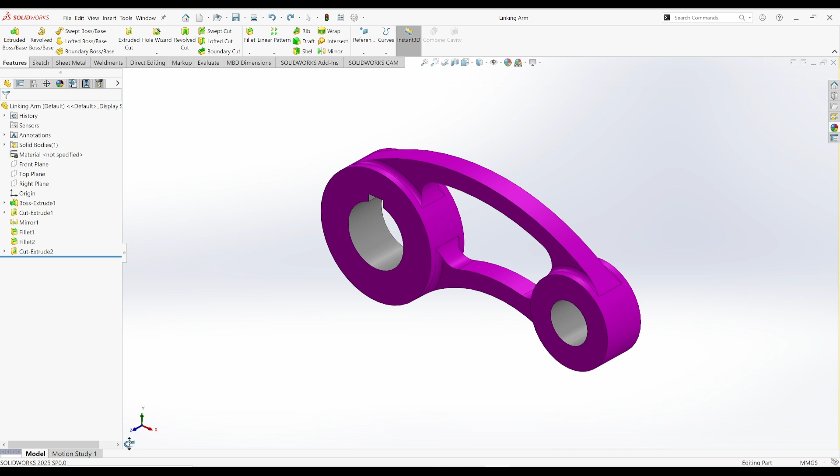Hey guys, in this video I'm going to be modeling this linking arm with you step by step in SolidWorks. So let's jump right into it.

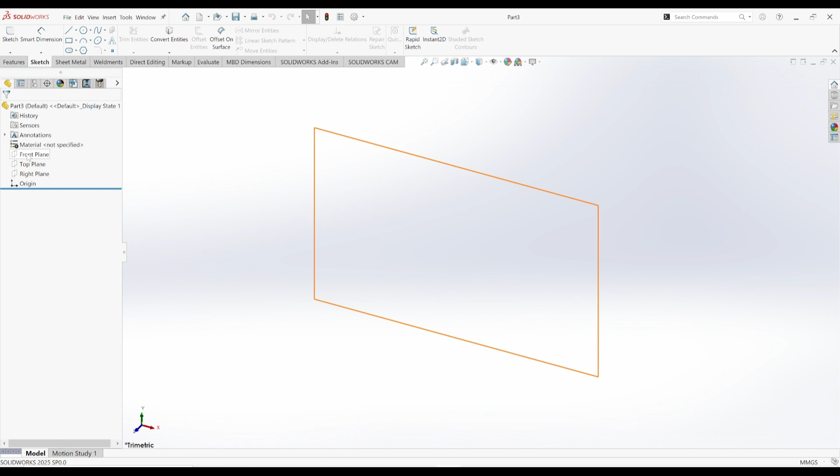So first I have my SolidWorks open here. I'll come to the top section here and select new, click on part and click on OK. Once that's open, I can extend this a bit. So I'll start with my sketch. Check that your units are in millimeters, so I have mine in mm. That's perfect. So I'll start with my front plane, select front plane or right click and select sketch.

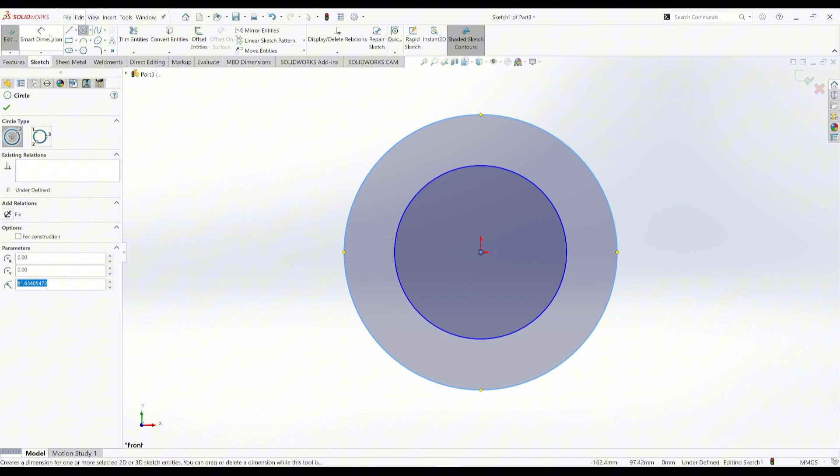I'll start with a circle. I'll come to this top menu here, select circle. I'll move to my origin, snap and extend. I'll create another circle from the origin, snap and extend. So I have dimensioned these two circles by coming to Smart Dimension. Select the first circle and this has an OD of 60 mm. Select the smaller circle and this has an OD of 30 mm.

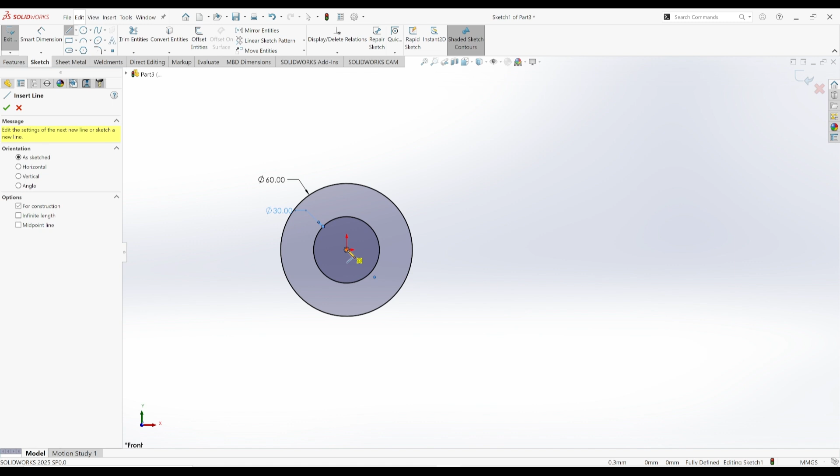So next I'll zoom out a bit and move to line. I need a construction line for the right side. So I'll select line here, under option select for construction. I'll snap from my origin to the right. Escape. If it doesn't end up horizontal, you can select the line and then make it horizontal, but mine already is.

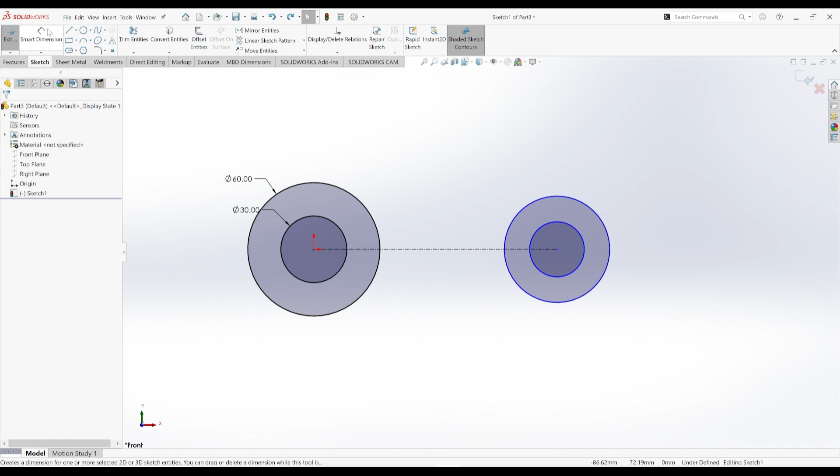So I'll draw two circles as well. Come to circle here. I'll draw my first circle and my second circle. So I'll dimension them as well. I'll go to Smart Dimension at the top. I'll select the first circle, that's going to be 42. I'll select the smaller circle, that's going to be 20.

Now with that defined, the center points of the circles from each other are dimensioned. So Smart Dimension as well, you can just select this line instead and define it to be 105.

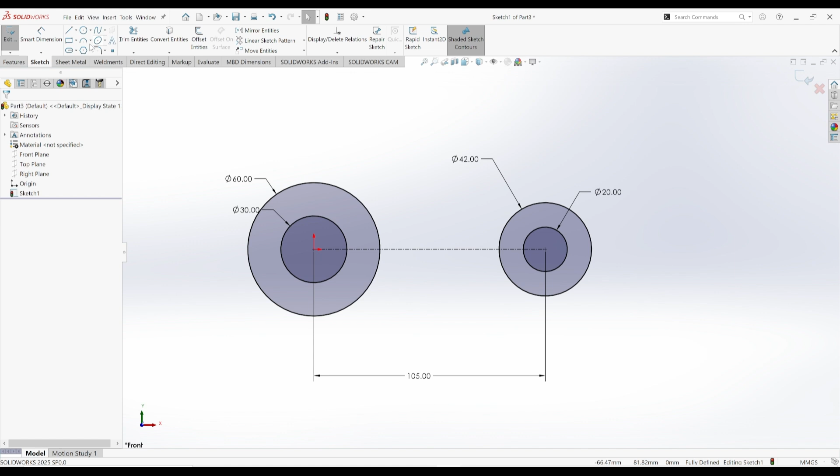Okay, so now I have that. I just need to add those two arms or the linkage. So in this case, we'll use 3-point arc. If you don't have it selected already, you can drop down here and select 3-point arc, or once you select the arc function here, you select it here. So I already have it selected. I'll select the first end here to this end and snap anywhere here.

First I'll define my radius, come to Smart Dimension, select this and define it to be 115. Hit escape, select your arc and this circle and make them tangent, and we'll do the same on the other side as well. Your arc and this circle, make them tangent as well.

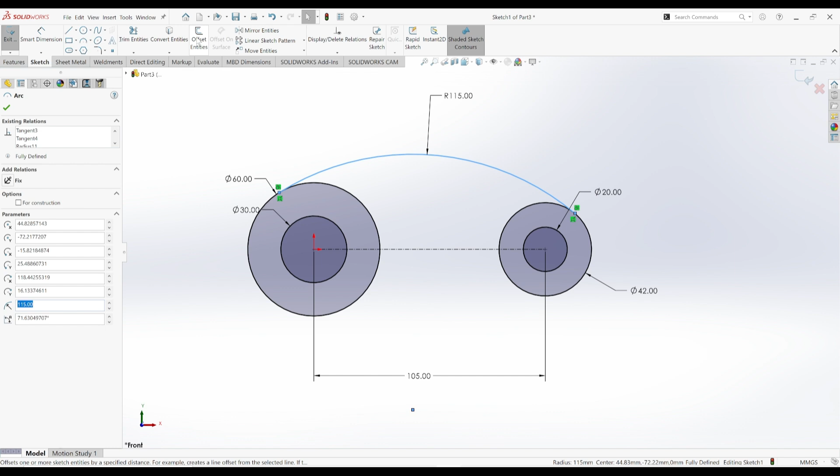So next thing we want to do is make an offset. I'm moving this dimension so you can see well. I'll select this arc and make an offset downward by 8 mm. So select that line and click on offset entities here, and define a distance of 8, and this is perfect, click OK. So now I'll trim this excess off. I'll come to trim entities, leave it at power trim, and I'll cut this off and cut this off. Hit escape. So we'll do something similar for the lower arm.

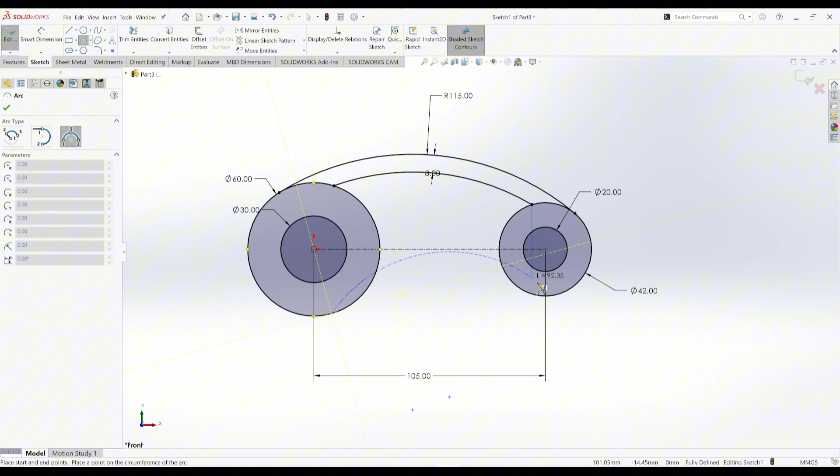So select your 3-point arc, this circle to this circle and snap anywhere. I'll define the radius, Smart Dimension, select the arc, and its radius is 60. Select the arc and the big circle and make these tangent. We'll do the same thing here, arc and circle, make it tangent. So now it's fully defined.

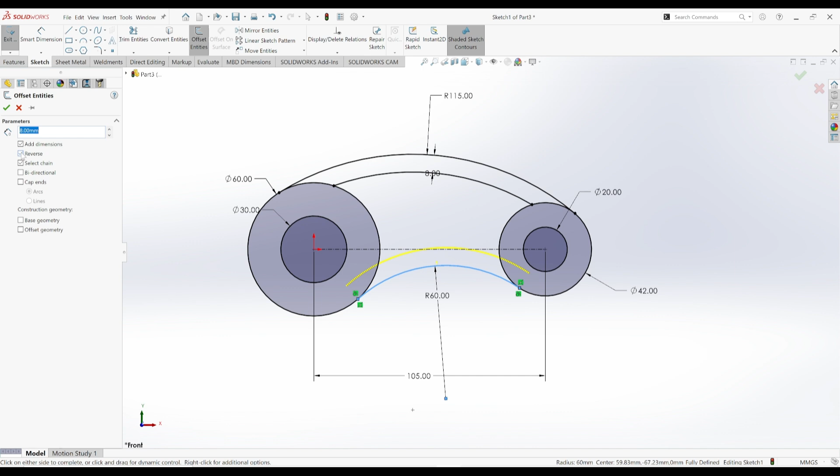I'll also offset it 8 mm, but in this case upwards. So I'll select the arc and click on offset entities. 8 mm is perfect, but it's in the wrong direction, so we'll toggle on reverse here and click on OK. So now I'll trim the excess off. I'll come to trim entities, trim this off and trim this off as well. Okay, click on OK. And I'll make an extrusion from here.

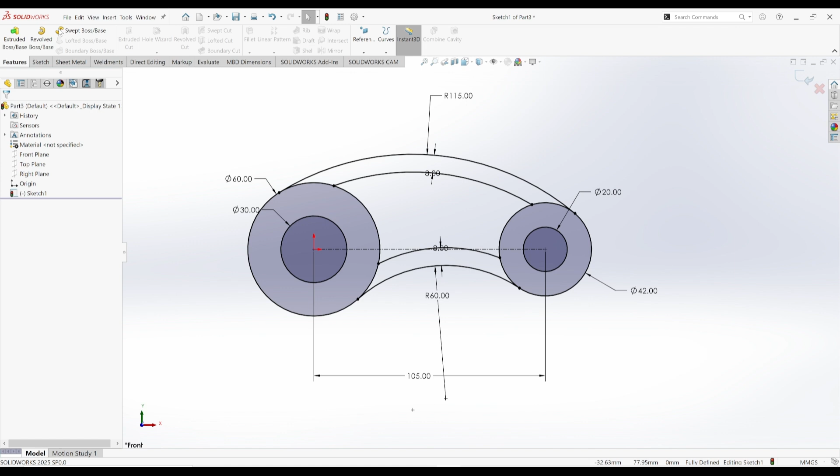So I'll go to features, Extruded Boss. The extrusion here is going to be 20. And I'll select this, this, and this. Okay, then my direction, drop down and select mid plane. So click on OK.

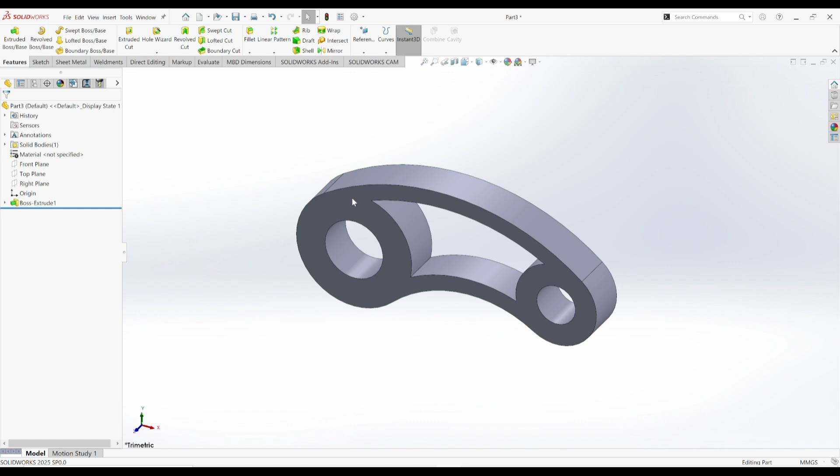So now we have the base, we just need to make a few cuts. So I'll select this face, right click and select sketch. So I'll select that face again and come to convert entities. Then I'll draw two circles again. So from the center point, I'll snap to this point. Center point, I'll snap to this point. That defines the OD, or you could define them manually if you want to.

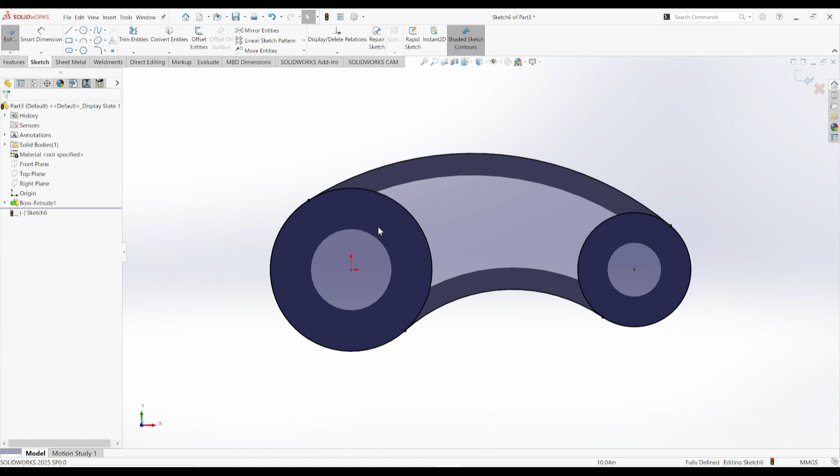So now I have that, I'll make a cut. So I'll come to features, extruded cut, and select contours, click on this window, and I'll select this section and this section. So I'm just going to be cutting it deep by 5 mm. Click on OK.

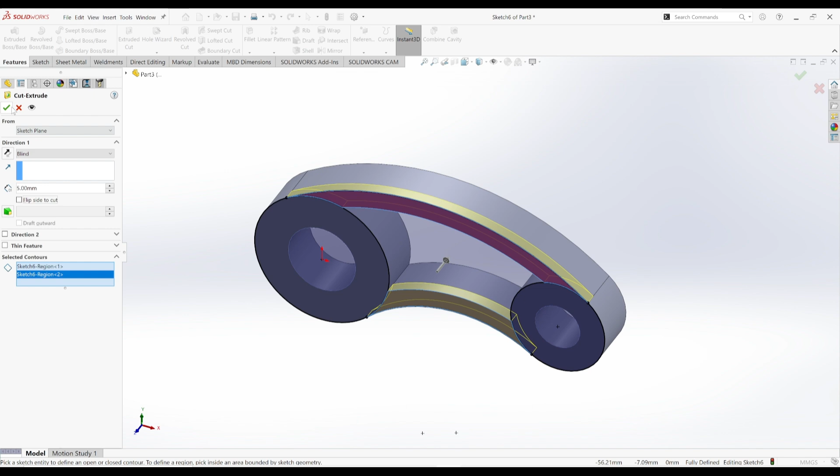So I'll mirror that cut extrude to the other side. I'll come to mirror here, drop down here to see my design tree. I'll select that feature. First I need to select the plane, so I'll mirror through the front plane, then click on this window to put the feature and select your cut extrude. Then click on OK. So now you have that.

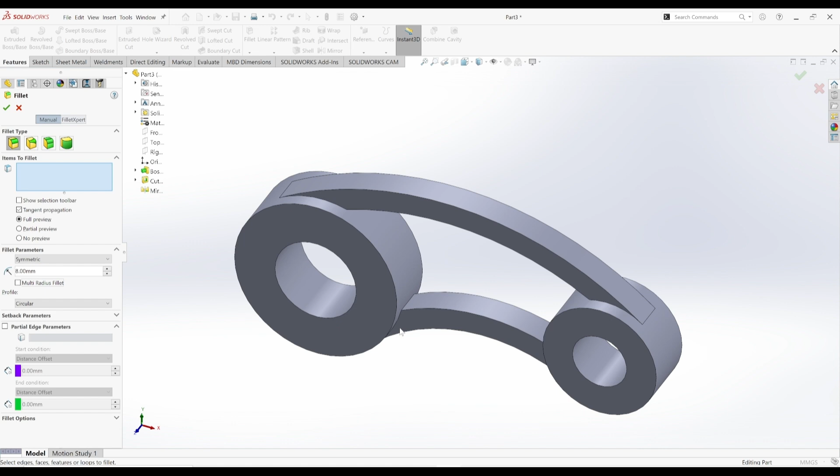We'll put in some fillets. So come to fillets, and for this internal section we have a fillet of 8 mm on all four corners. So I'll put in the value of 8 and select this corner, this corner, this corner, and this corner. Click on OK, that's perfect.

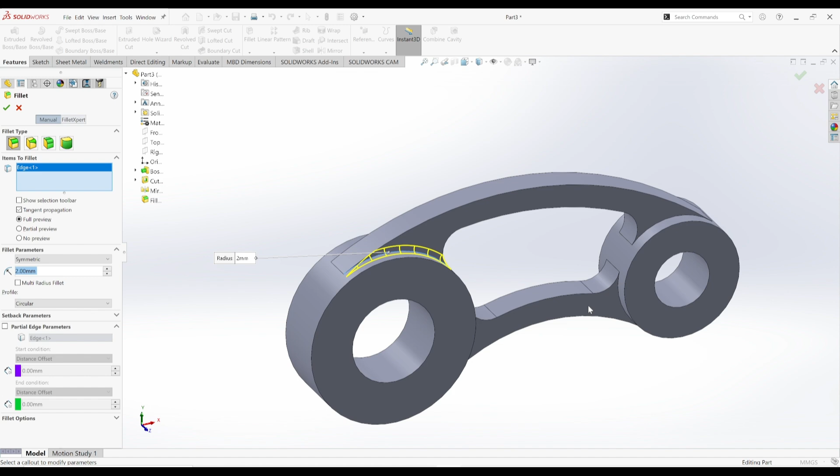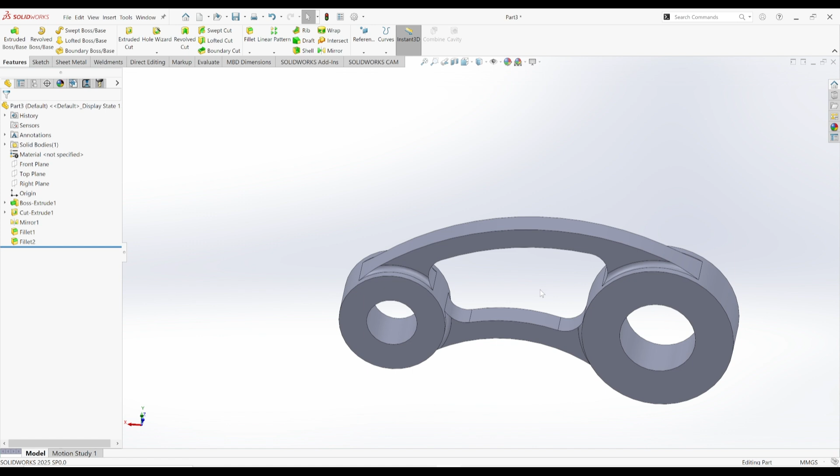Next, to add fillets to these edges. So I'll come to fillets again, in this case the fillets are 2 mm. So define 2 mm here and select this face, this, and this corner. You can flip to the other side and do the same thing: 1, 2, 3, and 4. That's perfect, hit OK. So now all we are left to do is just cut our keyway.

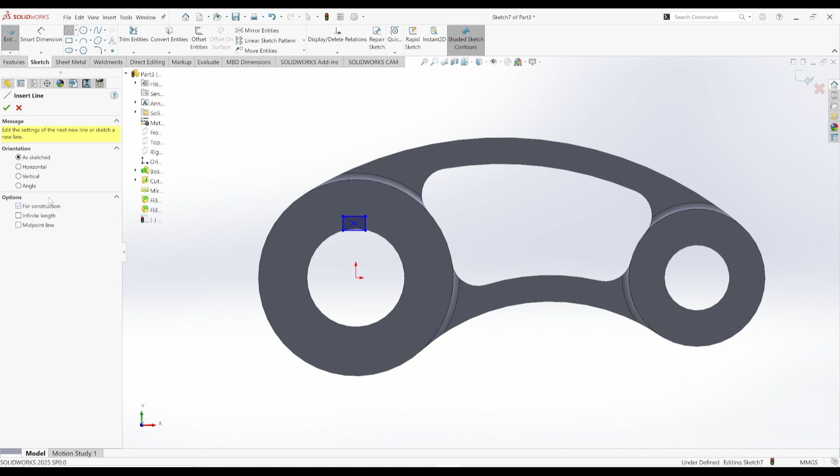So I'll select this face again, right click and sketch. And now I'll draw a rectangle, corner rectangle. From this end, just extend, escape, come to lines, create a construction line from the origin to this center point of your rectangle rather. I missed that snap, so I'm just going to zoom in a bit more. Okay, so I'll select this and click vertical. Okay, all right, that's okay.

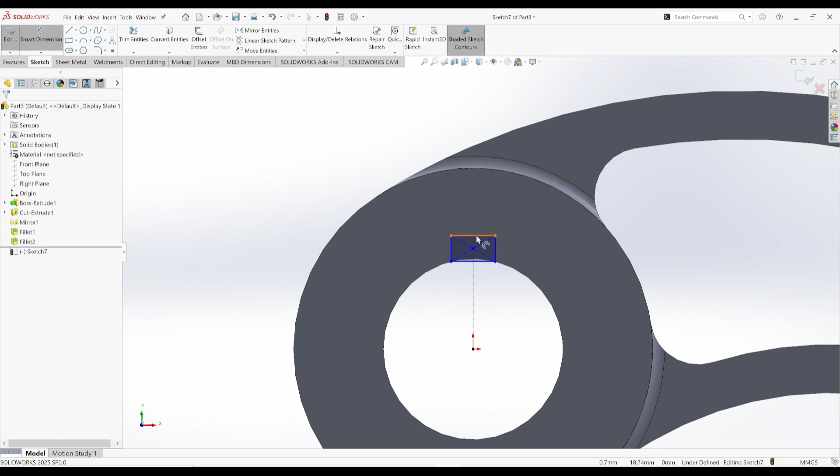So we'll add dimensions in Smart Dimension, and the width is 8 mm. Then the height of this is 3.5. And we'll make a cut extrude: features, extruded cut, and in this case drop down and select through all, and click on OK. Yeah, and with that we have our linking arm modeled.

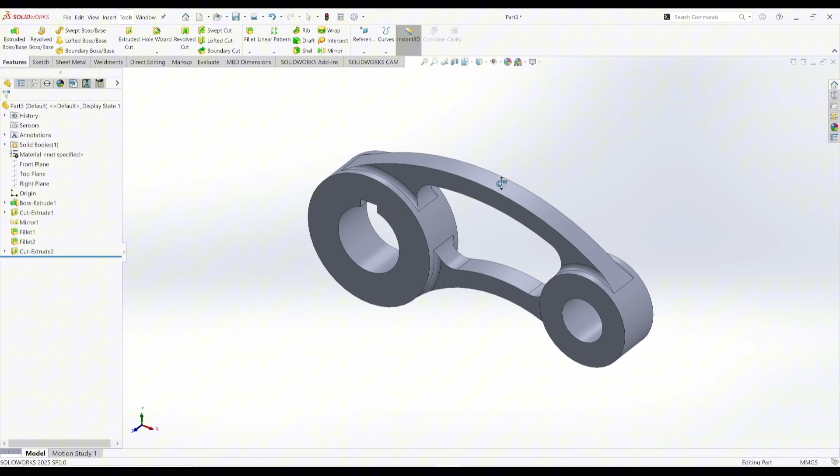I'll show you the front view, and this is the ISO view.